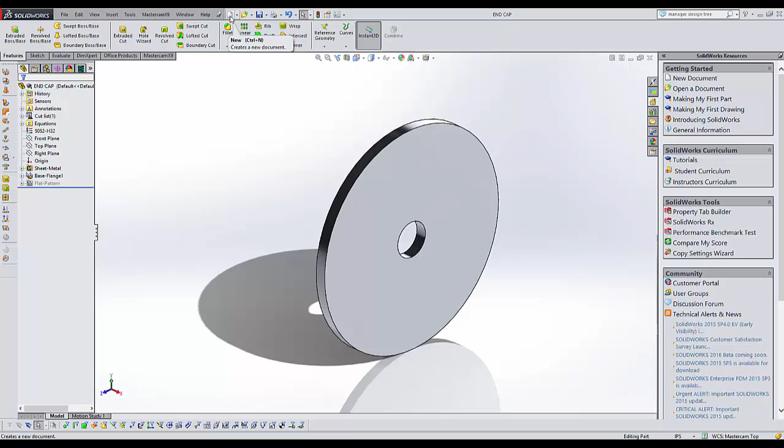Now we're going to start the handle. We have finished the end cap, so we're going to come up here and start a new drawing, a new part, and hit OK. What we want to do is design this handle so it mates up with the end cap, and the end cap was originally drawn on the right plane. So we will do that same thing with the handle.

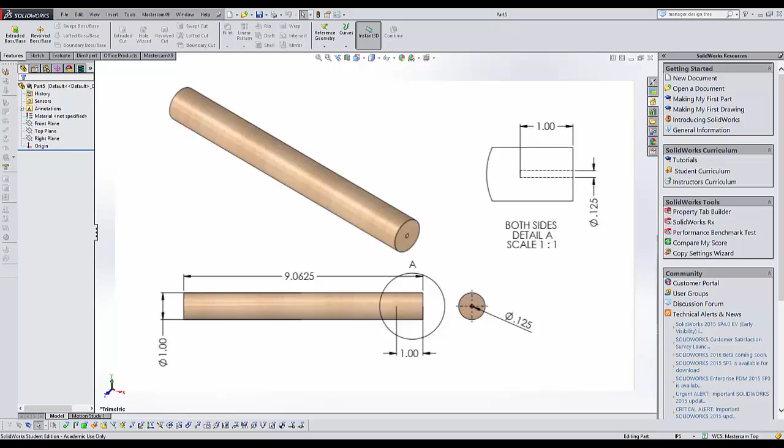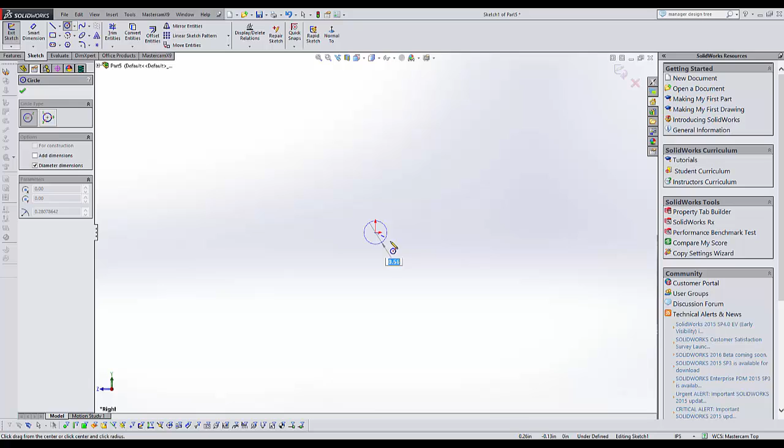First, we want to make sure that inch, pound, and seconds is activated. Then we can come up here and choose the right plane, and we can activate our sketch immediately. The first object of the drawing is a circle or the geometry, so we can choose the circle sketch command. We'll lock it in at the origin, and we'll pull out to a certain distance, whatever it will be.

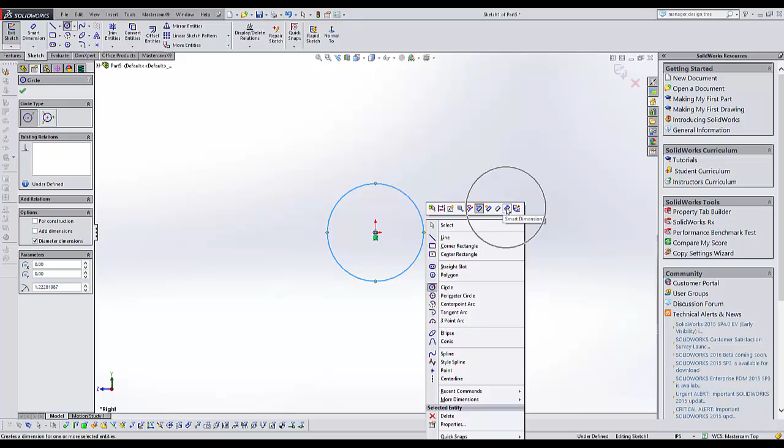Now, last time when we dimensioned the end cap, we came up here and chose Smart Dimensions. This time, let's right button mouse click in space and choose Smart Dimension on the floating menu. Now I can touch my geometry, pull it out to where I can see it, and put the value, which is 1 inch. At this point, we are done dimensioning the main geometry of the handle.

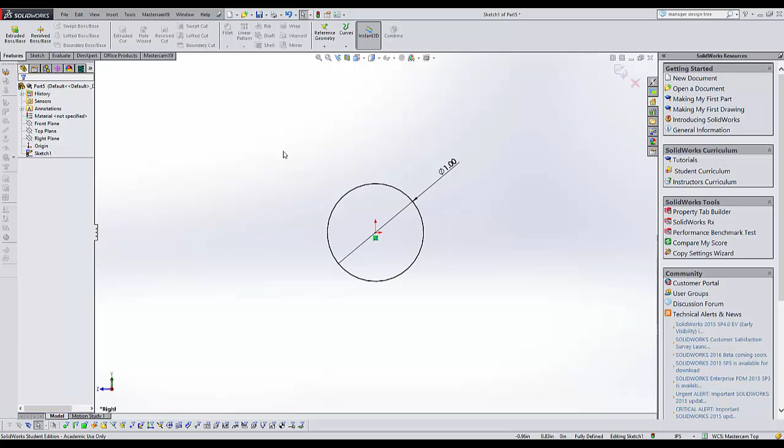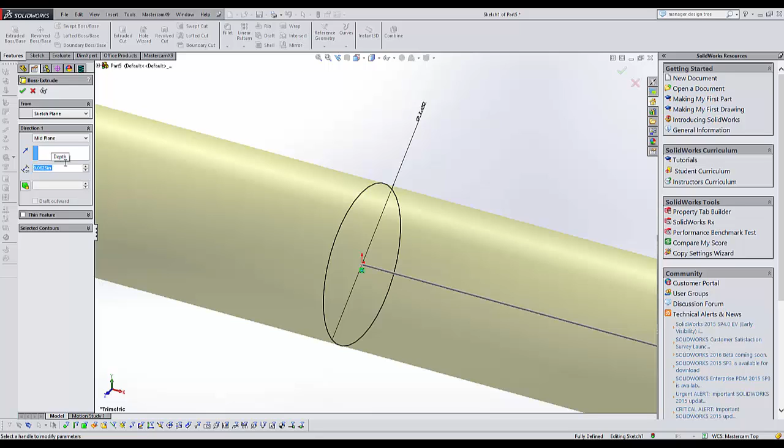Now we can go to Features. Features does an extruded boss/base, or we can use sheet metal. Well, the handle is not a sheet metal object. It's actually a wood object, so we want to stay with feature. We're going to choose extrude. From the sketch plane, blind, we want to choose midplane. And the overall dimension of that is 9.0625. And we'll hit check to accept that.

We will hit F on the keyboard to make it fit. So there's a new command there. The letter F on the keyboard will allow you to fit the screen. Now looking at this object, it is basically silver. It's not the color we're looking for or the materials. Let's set the material that we're going to use for this part.

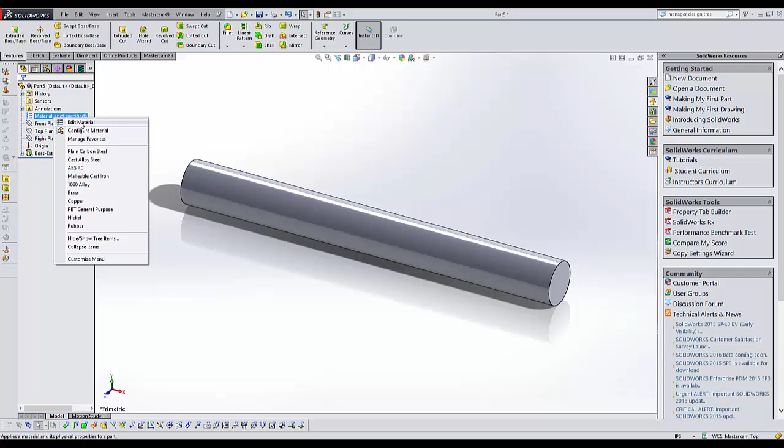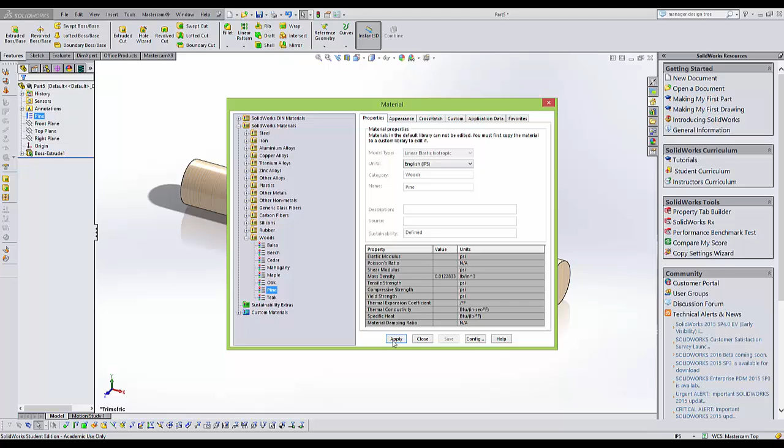We'll come up to Material in the FeatureManager Design Tree, right button mouse click on it, and Edit Materials. We will select to minus the steel so we can see all our materials, and we're going to come down here to wood, expand the wood, and we'll use pine. Now at your local hardware store, you may find poplar, maple, oak, but it has to be a 1-inch dowel, basically what we're using, but pine will be fine. We'll select that, close that, and now our material is based off pine.

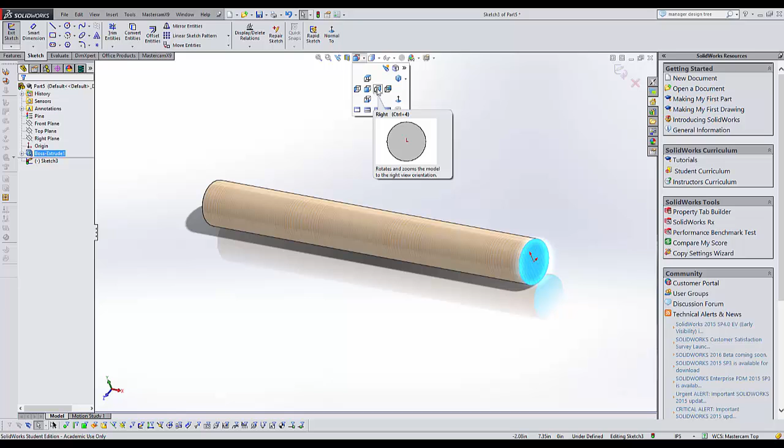Okay, let's get started with the small holes at the end so we can screw the end cap onto the handle in our final assembly. What we need to do is choose the plane, or what we call a surface, that we can sketch on. I will select the end, come up to sketch, and activate that plane. I need to go to the heads up toolbar, the view orientation, so I can see what that is. That is the right view, so if I want to look straight onto it, I can choose the right view here. And there we have the right view.

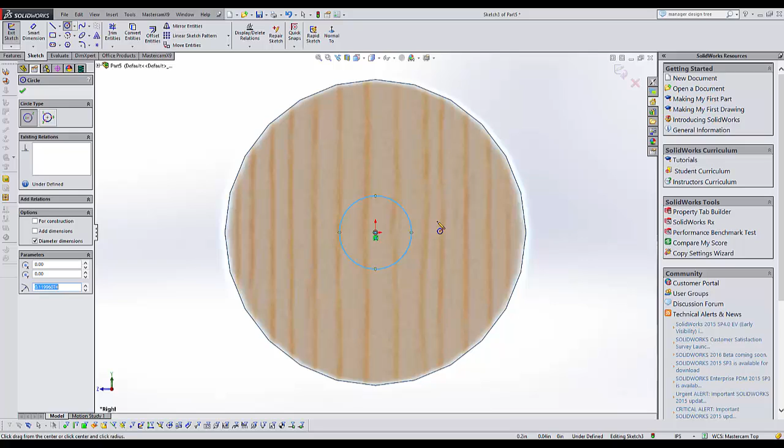Okay, and now we do want to create a circle off the origin on that plane. Now we're on that end, and we move it out, and again, remember, right button mouse click, select Smart Dimension, pull our dimension out and put the value in, which is 1/8 of an inch. Now I have this 2D geometry that I'm going to use to cut into my solid material. And that would be a feature. So we'll choose our feature tab.

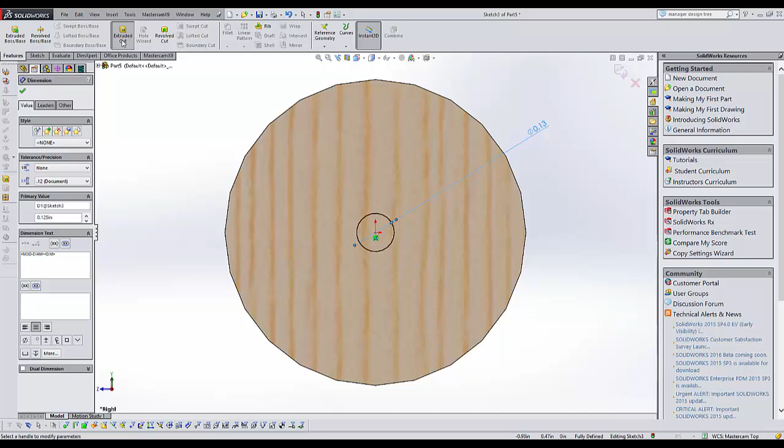Cut extrude, and we'll look at it from the side here. Right now, it looks like it's going the whole distance of the part, but based off the drawing, I'm going to hit F to fit again. Based off the drawing, we know that it's only 1 inch into the part. And if I rotate this around, it gives me a visual of what I'm doing.

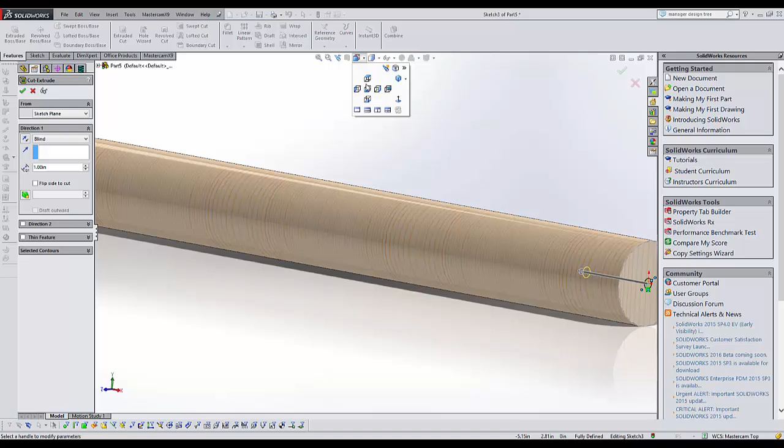If I wanted to go to my view orientation, I can look at it from probably the front, hit F to fit, and you can see it gives me the 1 inch distance here. I'll hit check, and now I just cut a hole into my solid piece of wood.

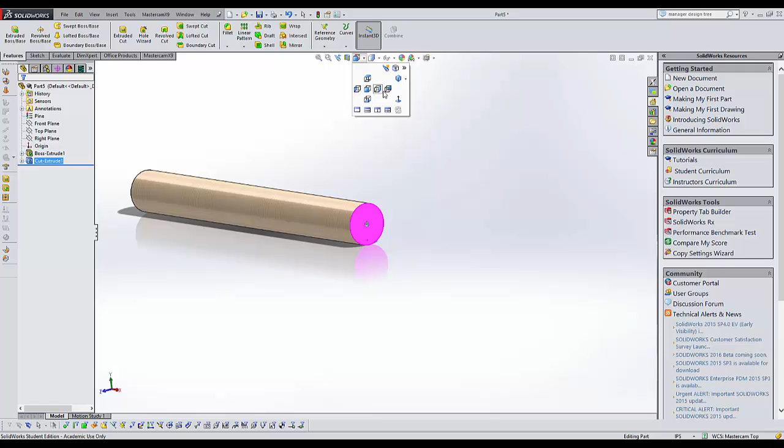Again, I'm going to come up to view orientation. I'll go to the top view, and since I'm up here in the heads up toolbar, I'm going to hidden lines visible, and we can actually see the hidden lines of my cut in there.

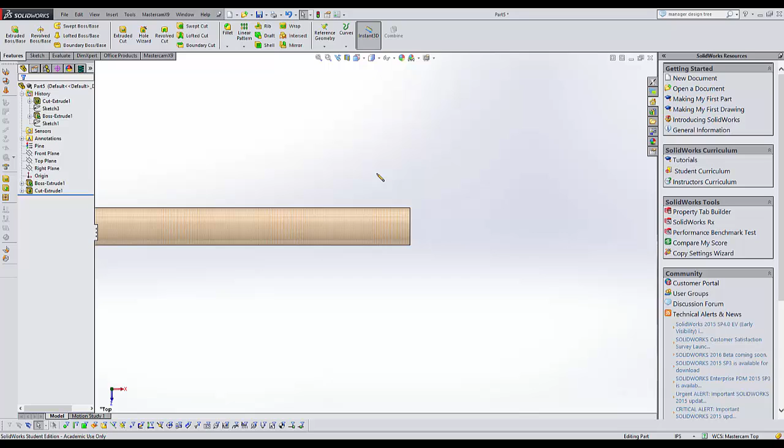Go back up here, and I'll turn it back onto solid with edges, and it shows my wood grain. If I come up here and turn off the edges, it just shows more of just the wood grain itself. I'll make it fit, and it looks more realistic, but I do like the edge curves myself. It gives me a better understanding.

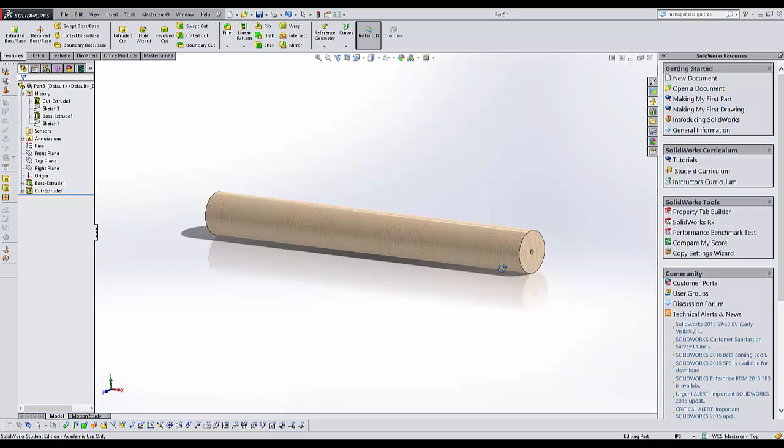Let's get started to try to create the end cut that we did here. I'm going to rotate holding my middle mouse button down. I'm going to take this image or this feature and mirror it over to this side here. So let's go ahead and do that. We'll activate our tab up here to features.

We'll come over here to linear patterns, expand linear patterns by hitting the down arrow button, and we'll look for mirror. When we hit mirror, our feature design manager will change, and it goes through a series of information that we have to answer. First, it says mirror face or plane. In the design area, expand the FeatureManager design tree and select the right plane.

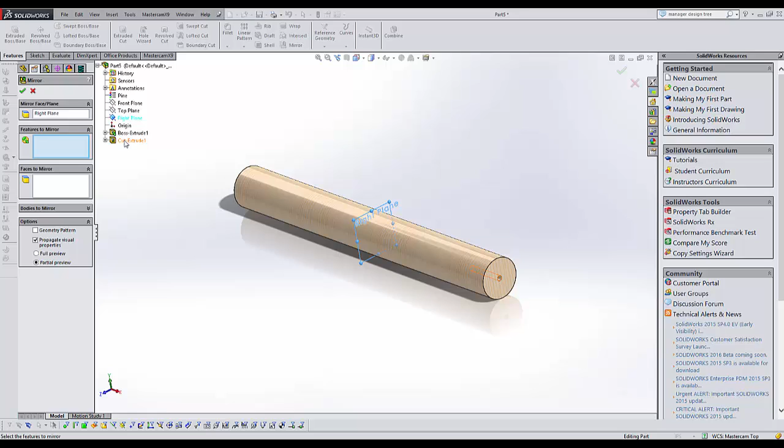The feature to mirror was the cut extrude, so that's the feature, and as you can see, it highlights and previews on this side. We can do partial preview or full preview, depending on how strong your computers are, or your graphics as well.

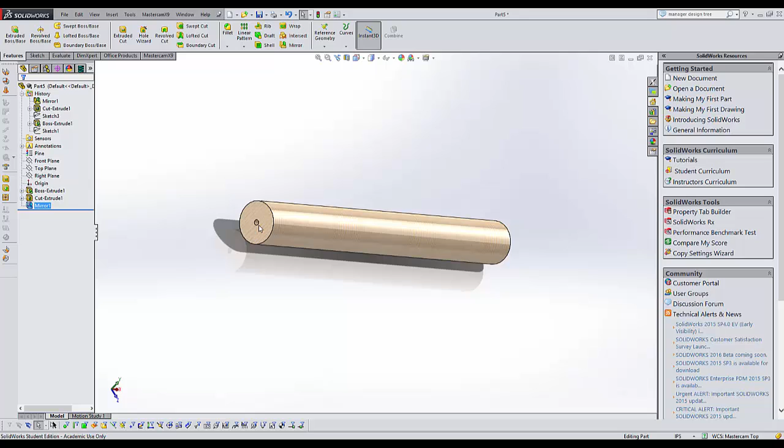I'll hit check, and if I rotate this around, it was easy enough to take this feature and mirror it about a plane to this side of the part. And if I hit my front view and change to my hidden lines visible, you can see it's on both sides. This part is fully defined and ready for assembly.

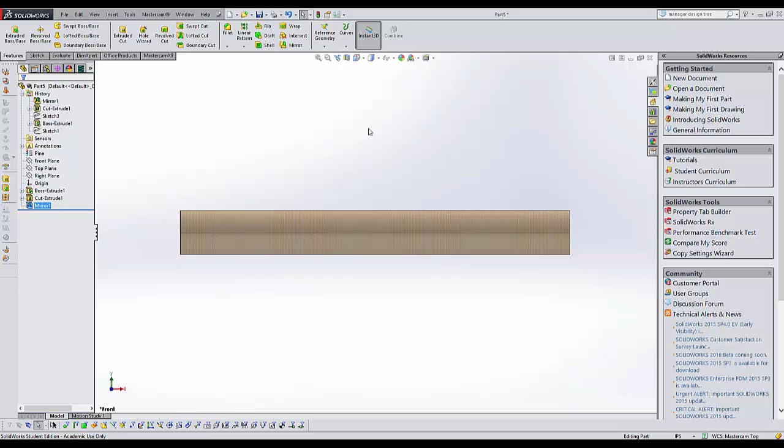I'll put it back to my edge curves. I will choose a new view here. We have isometric. I'll choose isometric. Now we must finish by saving our part. The name right now is Part 5. We haven't even attempted to save it, all the work we've done.

So it's real important at the beginning you learn to save. I let this go to show you that it is possible to finish drawings, but the most important thing is to set up a saving pattern as you design. So I'm going to hit the icon up here, save, give it a name. We'll call this Toolbox Handle. And now we're done with the drawing.

Good luck. Take your time and at your own pace, create this part.